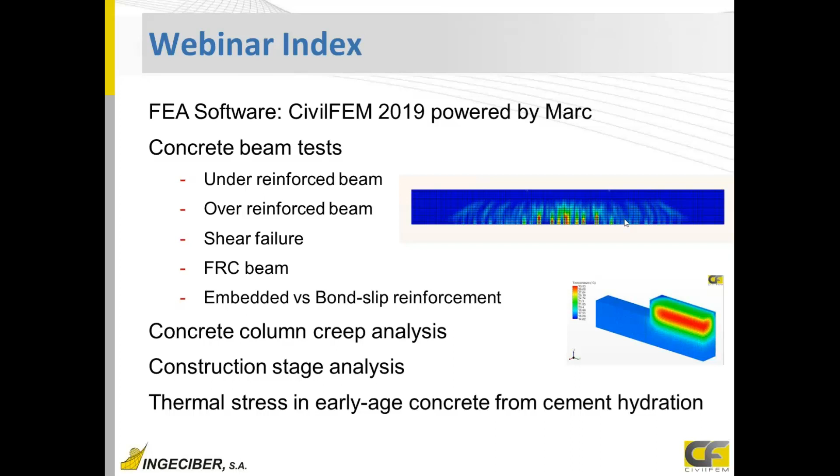So, first we'll have an overview of the software, that is CivilFEM 2019 Powered by Marc. Just to let you know, it is a multidisciplinary software which covers all the civil and structural engineering fields, geotechnical, construction, and as you can see, all these types of models for construction, seismic, foundations, power plants, all types of major infrastructure from the initial analysis to the end.

It's a general purpose civil, structural and geotechnical software that is focused on construction and civil engineering, and we are using a nonlinear solver, so it combines highly nonlinear models with code and standard verifications and some other tools. And the solver is Marc.

As you know, there's a big, reliable, trusted group behind this software, MSC Software, the developers and distributors of the famous Patran software, and because of an agreement between MSC Software and Ingeciber, we build and market CivilFEM Powered by Marc. So we are using the most advanced nonlinear solver from MSC Software. MSC Software is the company that develops Patran, Nastran, and so on.

So we are using a highly nonlinear solver, but combined with CivilFEM, focused on structural, civil, and geotechnical engineering. And let's go with the examples we are going to do with this software. It's very suitable for this type of nonlinear analysis focused on civil engineering.

First, for concrete modeling, there are different data that must be set. First, for the cracking and crushing behavior. For cracking, we have to input a cracking stress, and after that cracking stress, we can have a brittle behavior, that is a sudden loss of stiffness. We can add a softening modulus, and also we can add hardening and softening through a table for modeling fiber reinforced concrete.

Also for compression, we have this type of parabolic law that could follow nonlinear compression isotropic hardening with unloading and loading curves, or Buyukozturk plasticity. And also a Drucker-Prager series failure can be added to the model. Cracking and crushing are analyzed in principal stresses. The first example is an under-reinforced beam.

But before checking the first example, I'm going to have a small overview of the software. First, in the software CivilFEM, starting a new analysis, you have different options to generate the geometry, points, lines, volumes, Boolean operations as in any other CAD. So it's easy to use.

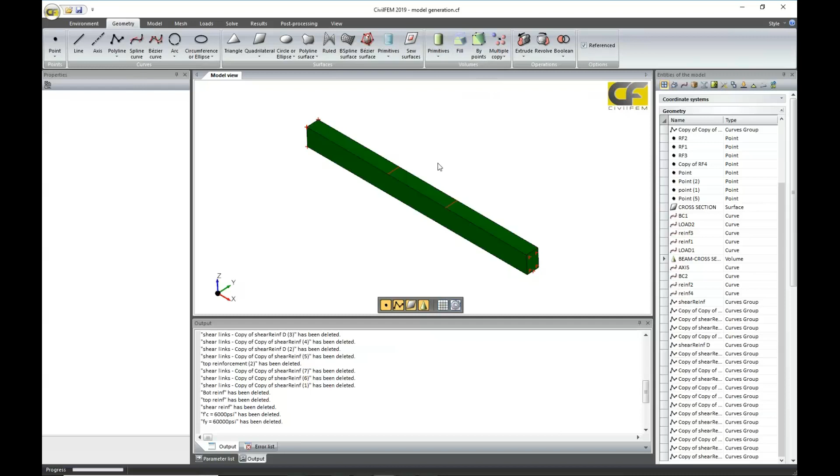Also, you can copy and paste the different copies. So it's very fast and easy. Also, you can import from any CAD. Just so as not to waste time, I've already generated the models, but this is a volume.

This volume will be meshed with solid elements for concrete. Also here there are some lines. We will use these lines for boundary conditions on bottom and to apply loads. So we will apply 2 vertical loads. It will be a simply supported beam.

Well, we will generate the model with solid elements for concrete, link of truss elements for reinforcement, and we will change different reinforcement configurations for analyzing different possible failures for compression, for cracking and tension of the reinforcement, shear, or different type of failures.

So well, once we have the geometry, then for the modeling, this is an office style software, so we have to go from left to right, following the different tabs. After generating the geometry or importing it, just model, first selecting elements. If we have beams or trusses, just the cross sections, concrete, steel, generic, and then we mesh.

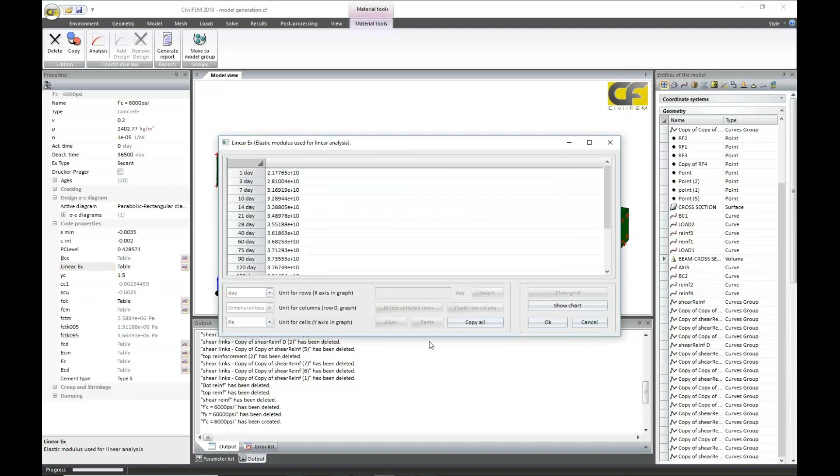For concrete, we select a concrete. In this case, it will be ACI code concrete, and we click here, this one. We will use it. Just clicking, we are selecting this material from the library. So all code properties are automatically defined here. For example, elasticity modulus, and all are time-dependent properties. So in the model, we can solve for different ages, and CivilFEM automatically updates all these properties.

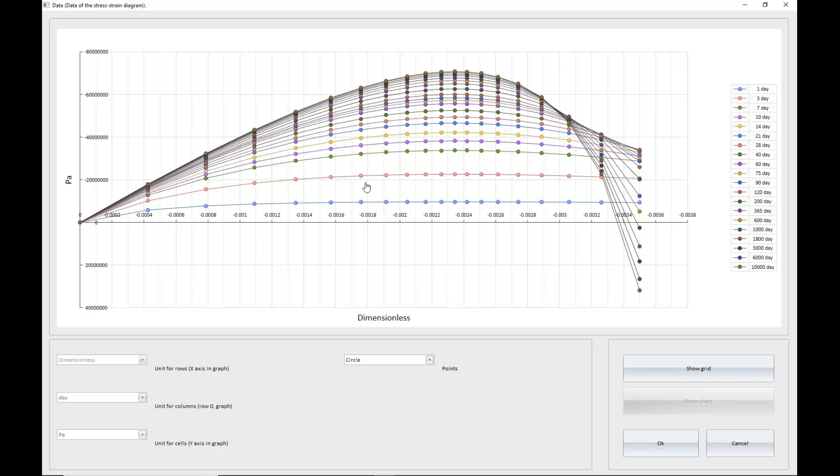Well, for this type of model, I would like to solve with a nonlinear behavior. So first, clicking here analysis, I will solve with short-term loads diagrams. This diagram is in the analysis diagram, short-term loads, this is the table that is going to be used. As I said, these are time-dependent properties, so I have several days with several stress-strain diagrams. When solving for different ages, CivilFEM will take one of these and change one for another if I'm solving the model for day 5, 10, 15 for evolutive stage analysis.

Also, it could be done with Buyukozturk plasticity model or isotropic plasticity model. I'm going to use isotropic plasticity models with loaded and unloaded curves, following the elasticity modulus and plastic deformation, which will make it easy to plot those plastic deformations. Well, that is for concrete nonlinear behavior in compression.

Let's see for tension. For tension, the first option is setting cracking. If I set cracking here, I will have crack stress. If I see the slides, this will be the crack stress I'm setting. I will have elastic behavior in tension, and when I get this crack stress, I could have a sudden failure of the element. I will have a vertical drop. Then I will have deformation without stresses.

Or I can have a softening or hardening and softening, depending on whether I'm modeling fiber reinforced concrete. The way to do that is here in the model: with softening modulus 0, it will be vertical. I can add a value here. In this case, it's a softening value that depends also on the properties of concrete, or it could be variable. It's variable with this table, an example.

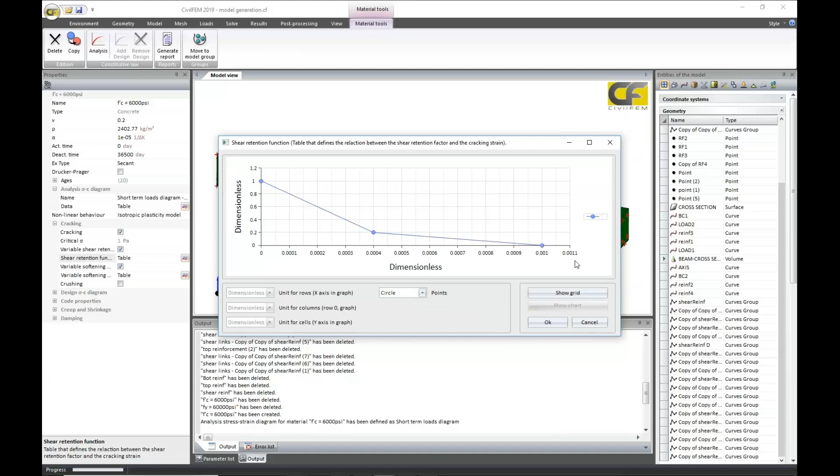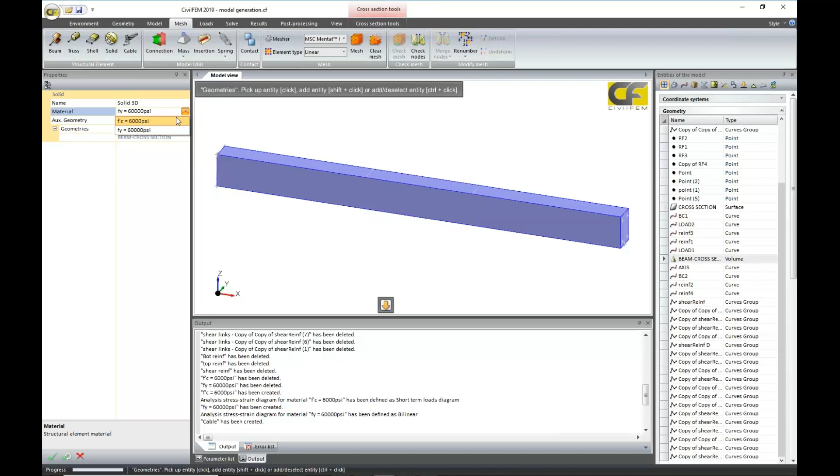So for the mesh, first for the solid elements, I'm going to create just for the beam the concrete material. Click here, and then I create mesh controls. I'm going to extrude the surface to have control in the section and in the extruding direction. As I need a very accurate model for crack developments and so on, I'm going to create a mesh, just as an example, with 2 centimeters element size in the section, and 1 or 2 centimeters in the length.

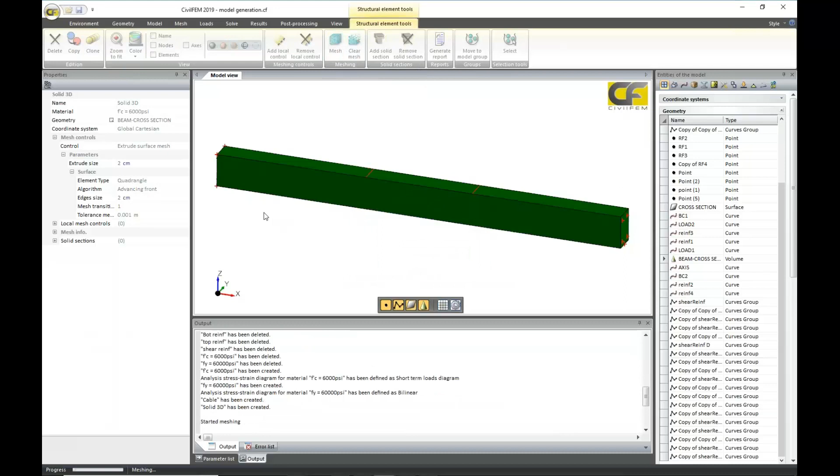So just click in mesh. I generate the mesh of this. Here you can see the meshing progress. Yeah, the finer the mesh, the more accurate it is, but you can always perform an estimation.

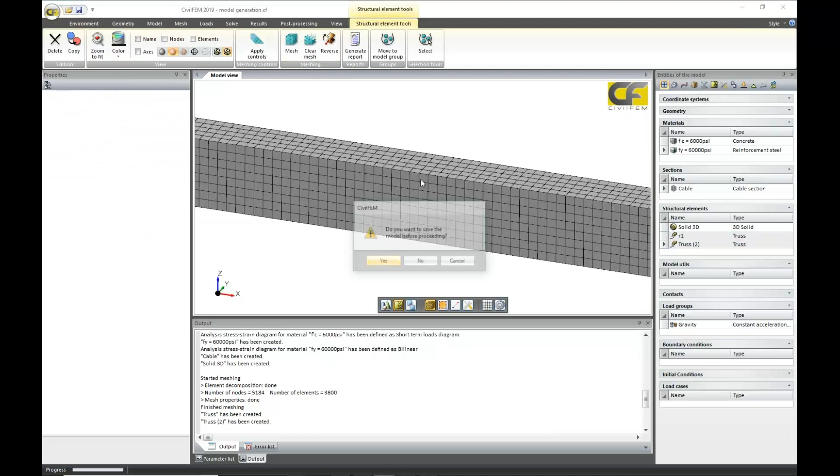In the same way, I can generate the reinforcement. So I'm going to add this bottom reinforcement, for example this one and this one, and just clicking here, I generate. Here you can see I've generated 2 trusses, reinforcement 1 and reinforcement 2, and I mesh both. Once I have meshed both, I just have to insert one into the other.

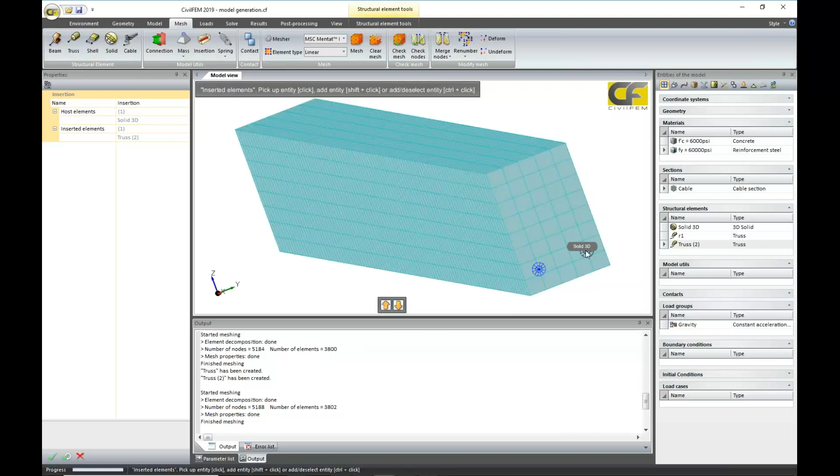You can see I don't have a congruent mesh, so I cannot merge the elements or the nodes, but I don't need to. A very important tool in CivilFEM is the insertion. If I click here on insertion, I'm going to insert into this model the 2 rebars, this one and the other one. So with this tool I insert reinforcement into concrete, and they will all work together. You couple the degrees of freedom of each entity.

So I did all the examples following these options, but I modified the bending reinforcement diameter and the reinforcement configuration, and applied 2 loads on top at a distance of half a meter from the support. It has a 1.5 meter span length, and I apply loads with different reinforcement configurations to analyze the possible failure. You will see them in the slides now.

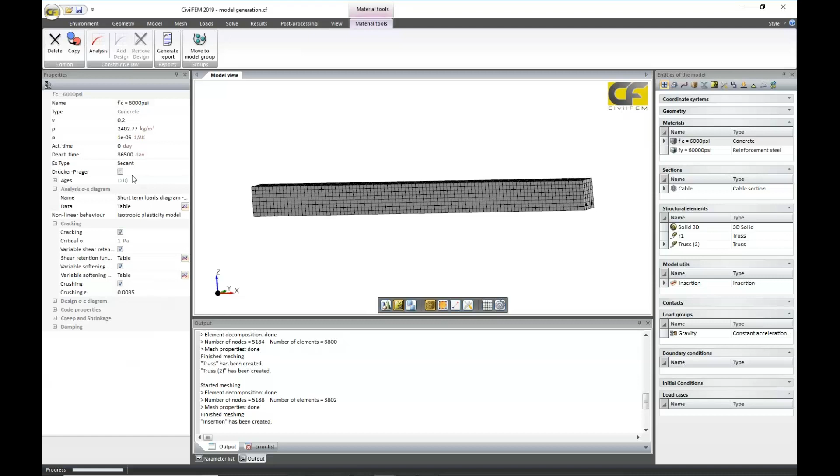Also very important, for compression I set a parabolic law, it will load and unload. But if I would like a brittle compression behavior, that is crushing, I have to set crushing here and define the strain for crushing. Codes limit the compressive strain of concrete to 0.35% or 0.3%. In this way, I will also have crushing failure. So we have completely defined all non-linearities. Now going to the models.

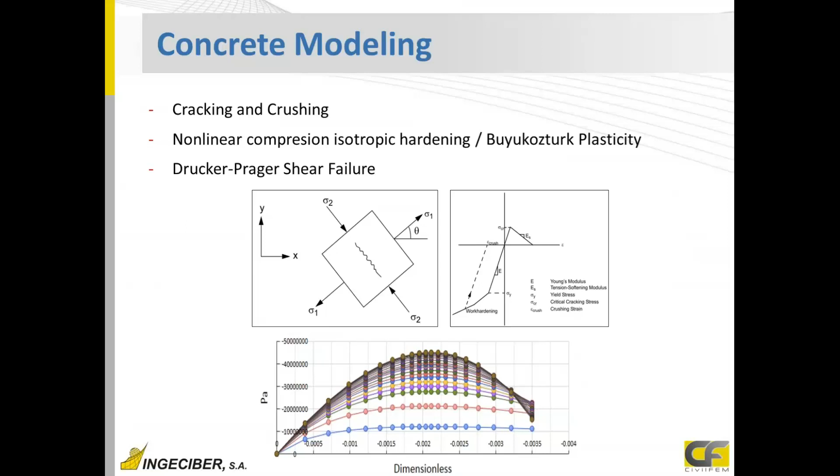Let's see different reinforcement configurations, and the next step is applying a load and solving it. So the first model, an under-reinforced beam. What I have here on the bottom is 2 bars of 16 millimeters, that is 400 square millimeters, and shear reinforcement, just enough to avoid shear failure, and I apply 2 loads.

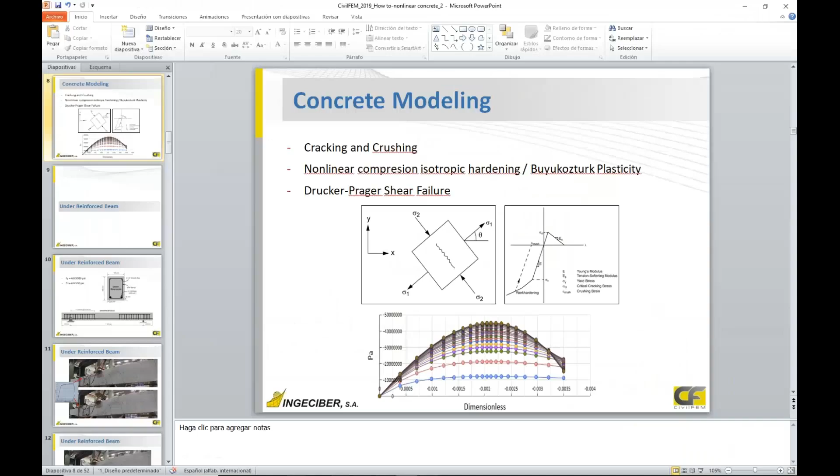Once I apply loads, I increase those loads till failure and analyze the different failures that happen. Also, these examples are compared with real tests. You can find these real tests in Structure Pro, and they have them in videos. They have analyzed them here in these videos.

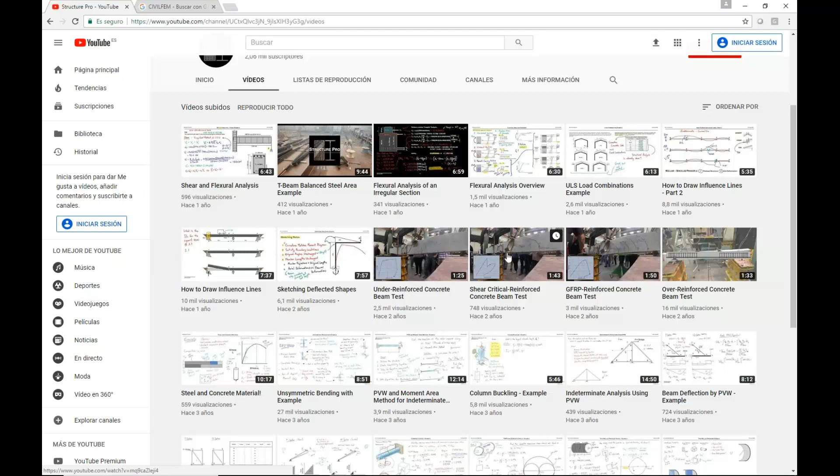They have different tests where they apply loads till they break those beams and get the relationship between loads and vertical deflection. So we follow the same examples and compare real test results with CivilFEM results. You can find these videos in Structure Pro at YouTube. So just analyzing the first example.

If we go to the software, just under reinforcement, this is the model we had. Here, this is the load we added. So here you can see simply supported, 1.5 meters span, 20 centimeters at both sides. Loads on 2 points at half meter from every support. So half meter to first load, half meter to the other, and half meter.

And we apply load till collapse. Till the model collapses means not converging, because the model breaks and doesn't converge. So it has been solved in 25 steps. And if we plot in one of these points the vertical displacement versus the load, we get this type of curve. We can see in this case we have a ductile behavior.

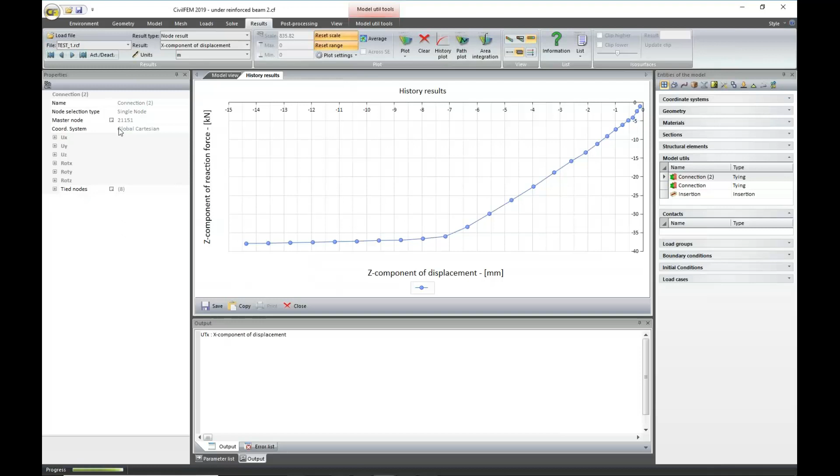First step here we have a modification, so it could mean cracking starts, but mainly elastic behavior. And then we have here a horizontal branch; the maximum load that we can apply is between 35 and 40 kilonewtons. So let's see what's happening in the model for these points, for the last one. So just going to the last load step that was solved.

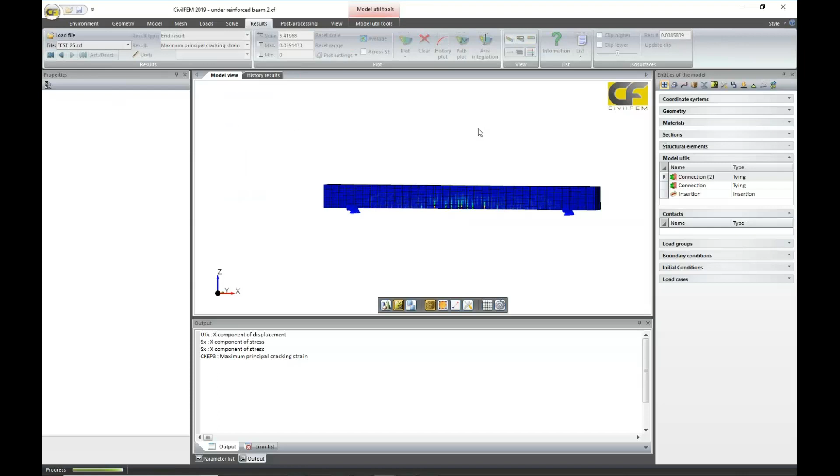Here in the model, I'm going to plot first cracking. So I'm going to plot here maximum principal cracking. Okay, I can see I have mainly bending cracks in the center. As I have here high crack widths, just to be able to see the rest, I'm going to reduce the range a little bit. So just one and plot here.

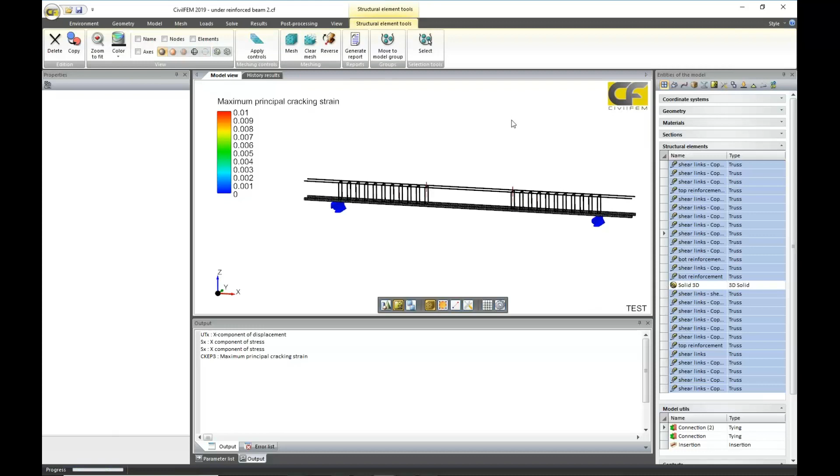I can see I have mainly bending cracks and no high shear cracks. So I can imagine this is mainly a bending failure. So if I hide the concrete part and plot the reinforcement bars, let's see if yielding is happening. As I saw here, I have 2 bars of 10 millimeters. So I'm going to plot the equivalent plastic strain.

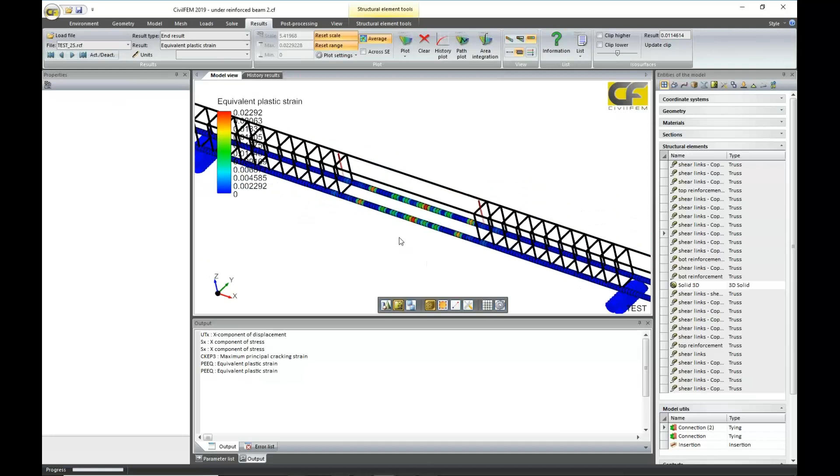I can see I have high yielding values where the cracks were generated, and only for bending, but no yielding for compression reinforcement and for these parts. Okay, so results quite good and just what was expected.

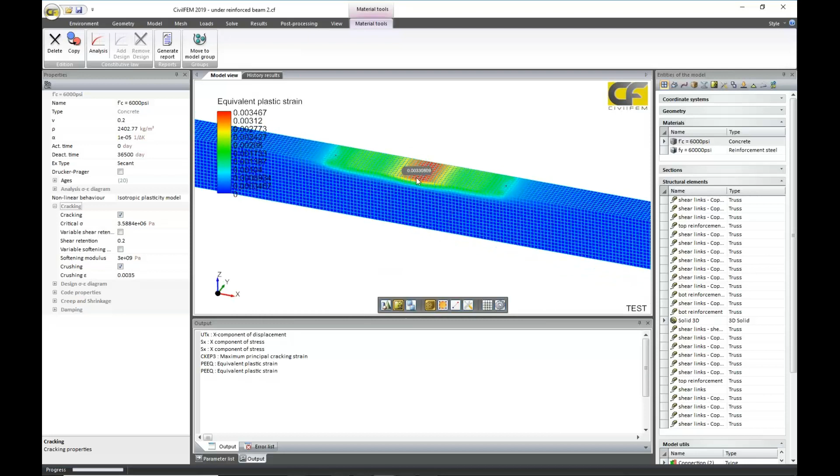I'm going to plot the crushing zone. As I said, I'm using isotropic plastic modeling, so compression deformation is analyzed by equivalent plastic strain. Here in my material, you saw that I have limit crushing to 0.0035. So it means when it reaches 0.0035, there's a failure. So I can see in this model I have at the end a compression failure, crushing in this zone. But I also have yielding and high cracks here.

So I can see I start having cracking. Let's plot this point. I can see I have first cracks, very low compression strain, but cracks, and still yielding. And then the final step is high cracks, still yielding, and finally we have compression failure at the end as well. So let's see the slides.

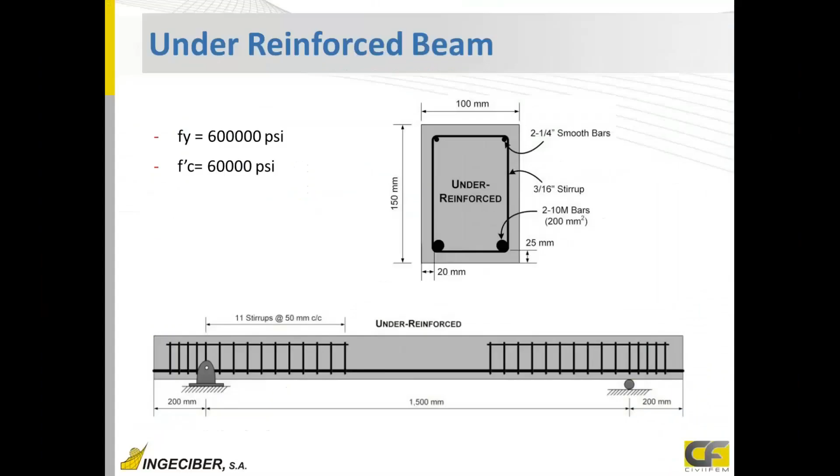You can see we can monitor each step of the analysis. Here, these are the tests that were done, and you can see this horizontal branch, which is between 35 and 40, close to CivilFEM results. Cracks start mainly in the center and vertical, so they are not shear cracks; it's mainly bending. And then when we have this sudden collapse, you can see a piece of concrete is broken due to compression.

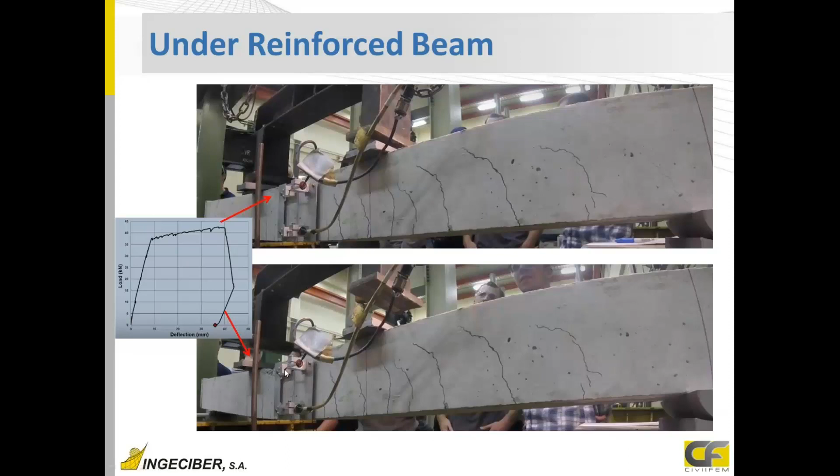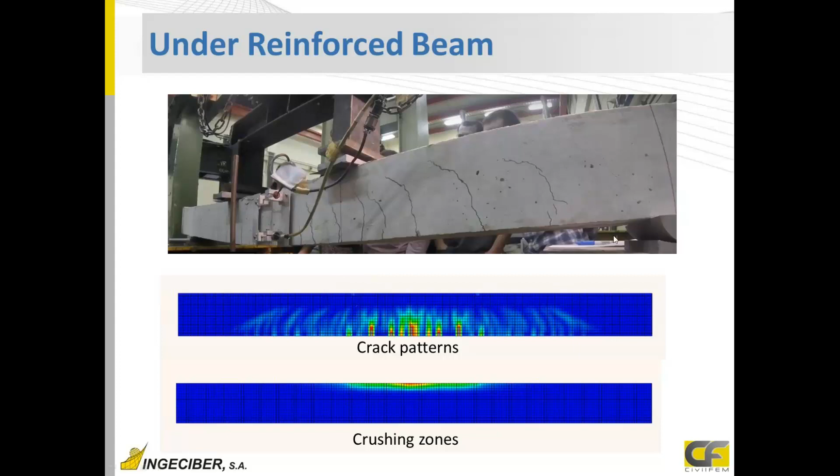So we have first cracks, yielding in reinforcement, and this is under-reinforced. It means it is yielding and getting high values. So if we compare values, we have crack patterns that are very similar, vertical, mainly in the center, and not much shear, and also crushing zones in the center, similar to the ones we get. Here we have a video.

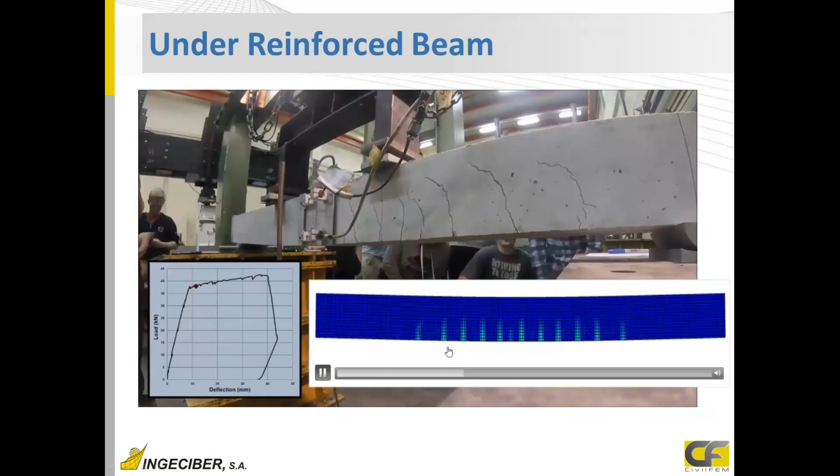In this video, you will see a point moving here, which is the real test, load versus deflection. And here we have the same model, but in CivilFEM. So here you can see that cracks start, vertical cracks as here, then they increase a lot, the horizontal branch, and then sudden collapse due to compression, more or less at the same time.

If we compare both curves, they start at similar points around 36-37, similar to CivilFEM. The CivilFEM curve is more horizontal because yielding in steel has a horizontal branch, with no hardening added for steel. The real behavior of steel has hardening, which this curve lacks, so we get a more sudden behavior earlier due to compression in concrete. The accuracy of CivilFEM is very, very high.

Next model, very similar, but in this case we increased the bending reinforcement a lot, from 16 to 20 millimeters diameter, increasing the area from 200 square millimeters to 600. Now we also don't have compression reinforcement, so we expect failure due to compression and not much yielding in the reinforcement.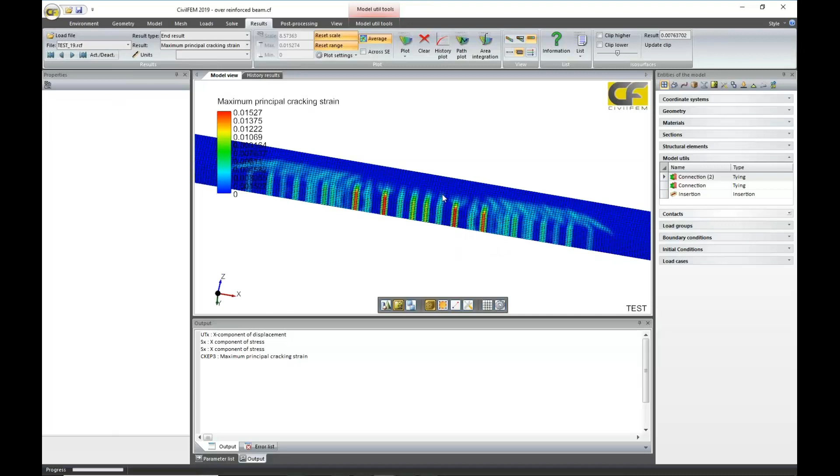I'm going to plot average values, but they are not as much as before. Bending cracking, but they are just small - they don't cross the whole section like they were doing before. Some cracks. Let's see what happens with reinforcement.

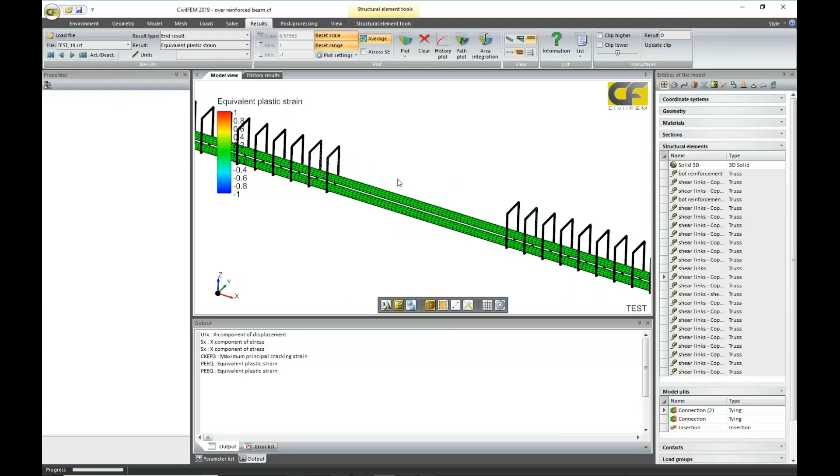In this case, let's plot equivalent plastic strain. We can see there's no yielding, so we're not having problems about tension in this model - no yielding in steel. You can see between 1 and -1, green is no yielding.

Now let's plot what's happening in concrete - concrete equivalent plastic strain, which means compression failure. We can see just at the points where we're applying loads we have higher compression, and in this load step it's around 0.25%. As we increase the load, just in this step it's 0.29.

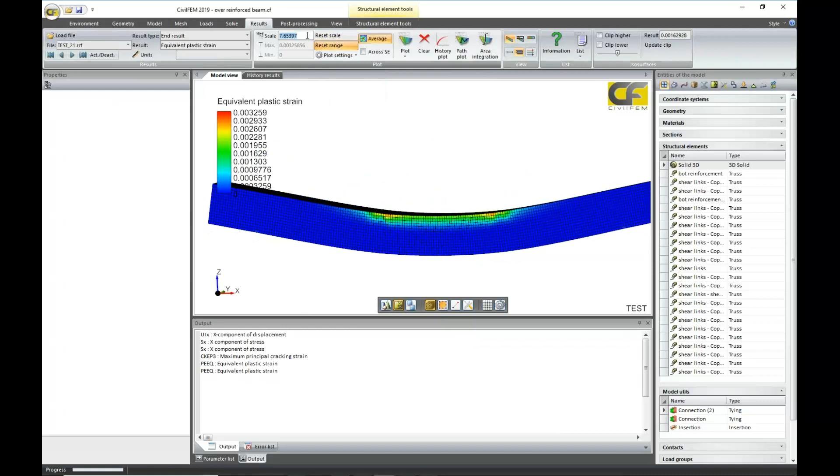This is the undeformed shape, but we can also plot the deformed shape, scaled as an example. At step 21, this is the deformed shape scaled. We can see at this point we're almost at the limit - 0.0032, and the limit is 35.

So next step it collapses and doesn't converge - that's what happened, the model breaks down. Those are the results: compression of concrete, then sudden collapse. So it's a brittle behavior of concrete due to compression over reinforced sections.

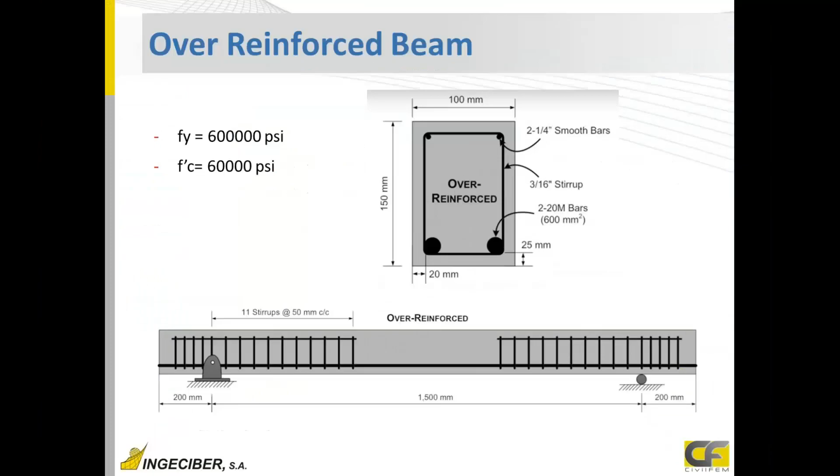If I look at these results, the test shows compression broken from the supports, from the loads I'm applying - 2 different loads at half a meter. Here we're applying a load here and another load here. So failure happens instead of in the center, as we saw before. It starts where we're applying the loads, and in the test there's a sudden collapse at 90 kilonewtons.

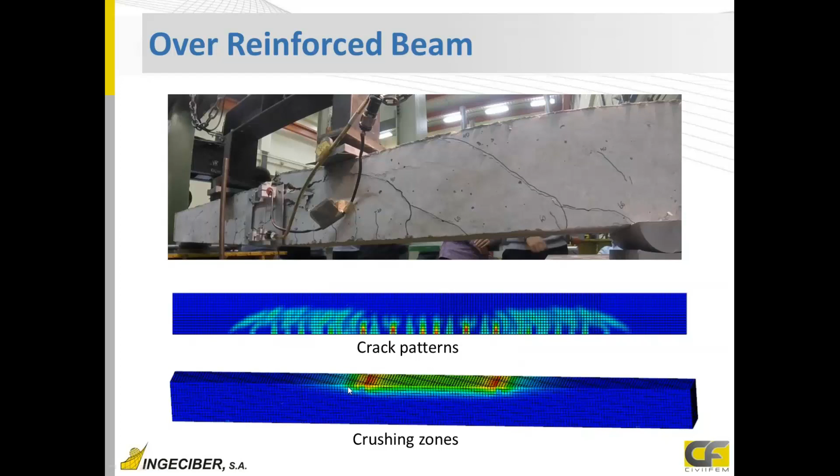Comparing the crack patterns: not high cracks for bending, not penetrating much, short and similar. Shear cracks are longer but not very wide, and crushing zones, which is the most important and represents the failure of this model.

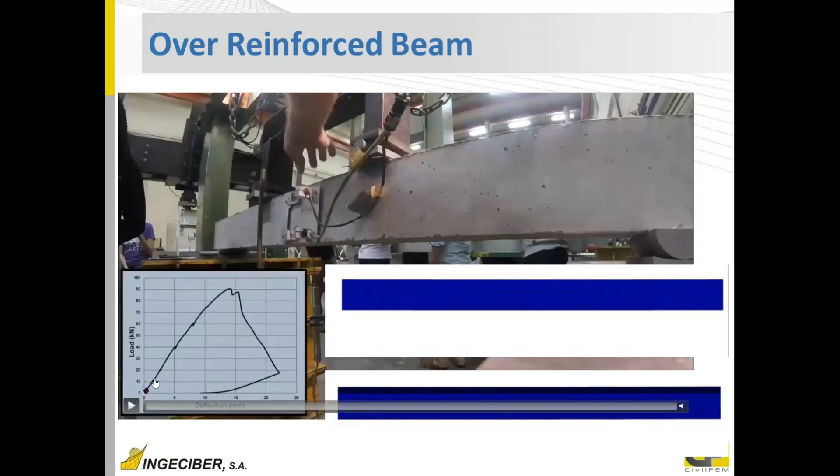In this video we compare the real test. Here we'll plot cracking, and here compression, deformation, and crushing. And here we'll see the relationship between load and vertical displacement. We can see first cracking started appearing here and here, similar. Shear cracking started appearing, and then just crushing happens. Let's see the video.

First, again, cracking at the bottom of the test and also in the CivilFEM model. Sorry, I didn't play both.

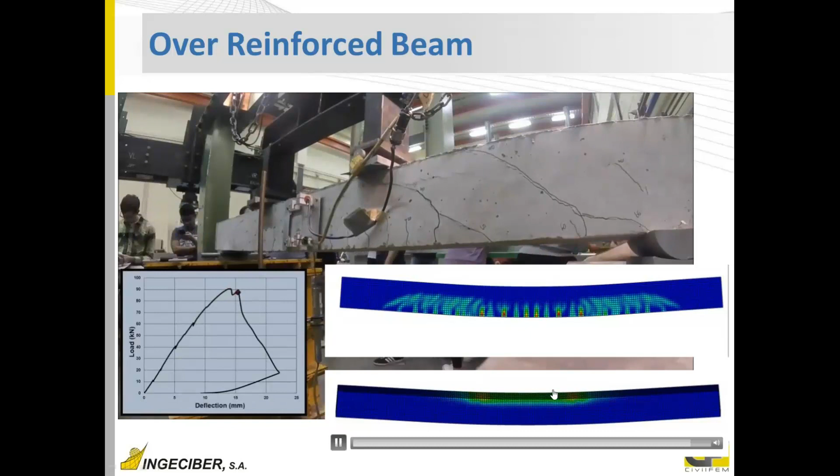So now we are playing both cracking in the CivilFEM model and in the test at the same time. Just when we are reaching the maximum load, here we can see cracking at the same time that it happens in the real test. Yeah, the accuracy is very high.

We can see the deflection versus load. It happens at about, in the real test, about 14 millimeters and 90 kilonewtons. With CivilFEM, it happens with a lower deflection, so we are having just like 90 kilonewtons and 11 deflection. So the accuracy is very close.

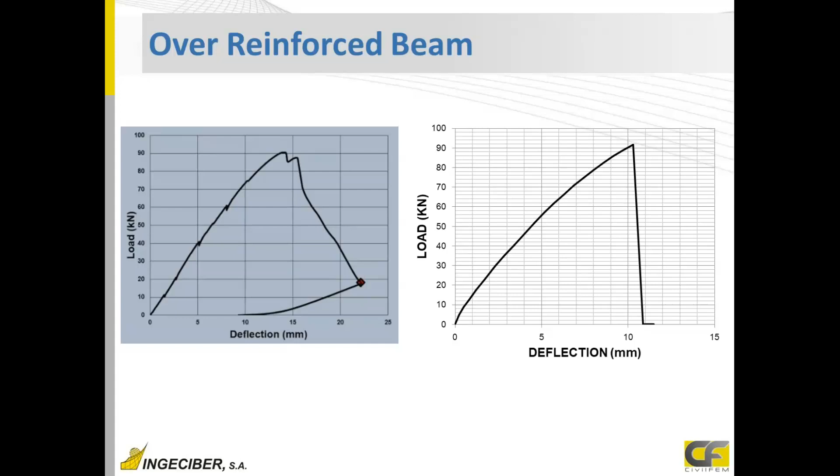I have to say we are using code and standard values for this, just concrete as a small variation. So maybe testing the real compression behavior, the real stress-strain relationship, we could have much more accurate results.

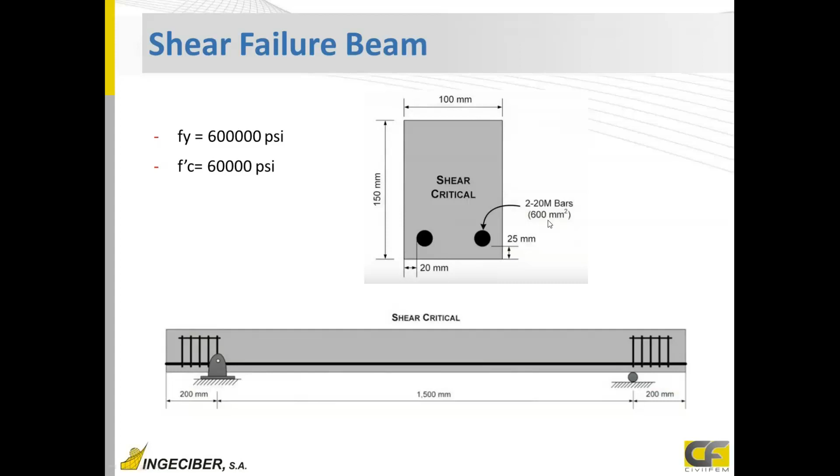Next model is shear failure. In this case, we are not adding shear reinforcement, we are not adding stirrups here. So only bottom reinforcement, the same that we had in the last over-reinforced bending model, but just removing that. So just checking the model as we did before.

The shear critical model, here it is. I'm going to plot vertical displacements versus load. Here we can see we have more or less a linear elastic behavior, and then suddenly failure.

Due to these cracks, I'm going to plot the last point to see the crackings, and what happens between this and the other. I'm going to start plotting this one, and let's advance to see how cracks are developed.

I can go to the last one. This one, for example, is still in this linear behavior, more or less linear, and I'm going to plot crackings.

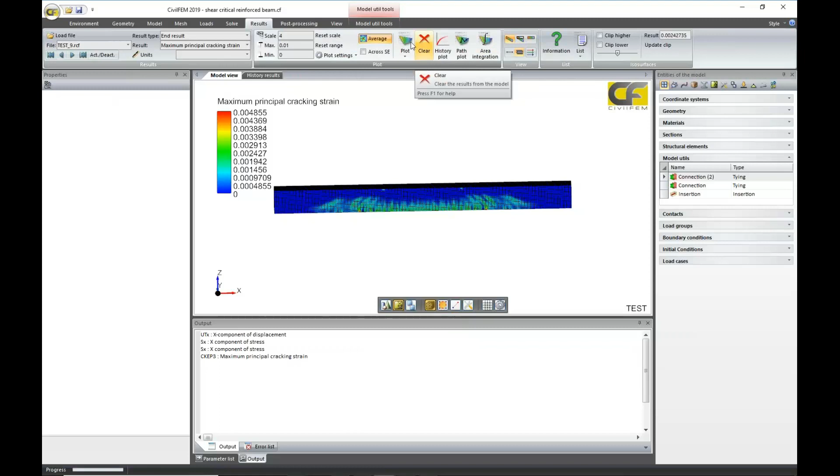I can plot cracks in X direction, Y direction, or maximum and minimum. Well, I can see here, these are my cracks. I'm going to fix the range so we can appreciate all the cracks.

So at this point I have some cracks, but not very wide. Mainly here I can see some shear cracks are higher than the bending ones, on both sides, but still not too high. So I increase the load, advance to next step.

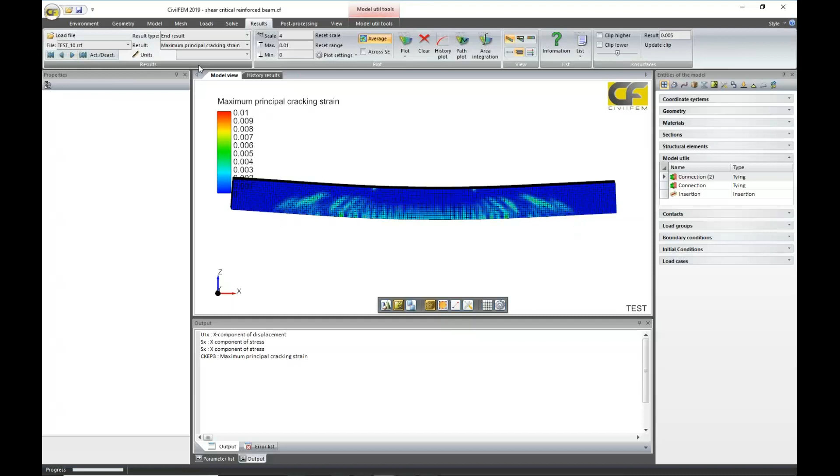Next step, you can see shear cracks are developed following 45 degrees from the supports. Suddenly a huge crack is developed, which means collapse at this point.

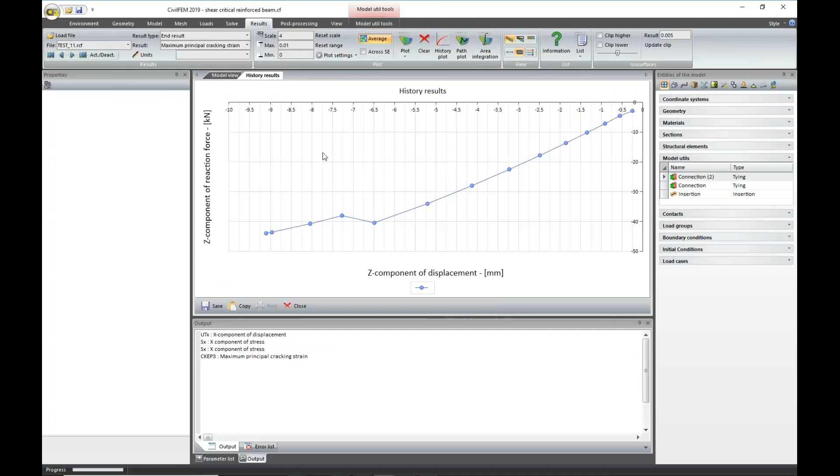And then we have some other steps that were solved, but you can see this is just complete collapse. So we could suppose this is the ultimate load for this model.

I increase it, and you can see the crack is almost crossing all of the model, and this is just converging because we still have some steel joining both parts, crossing from one point to the other. Then finally it doesn't converge.

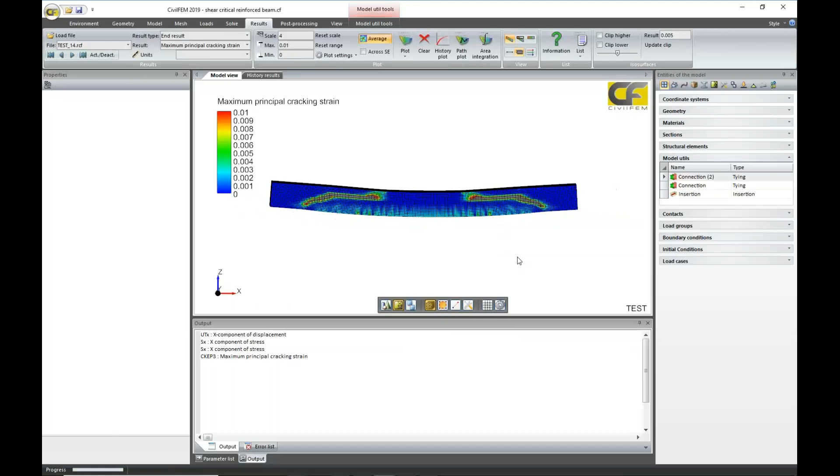We could also see yielding at the bottom, but it's very clear that it's shear failure.

If we compare with the real test we had, here you can see the model is the same, and here you can see that shear cracks are developed, high shear cracks, and we have the same type of behavior, vertical and sudden collapse.

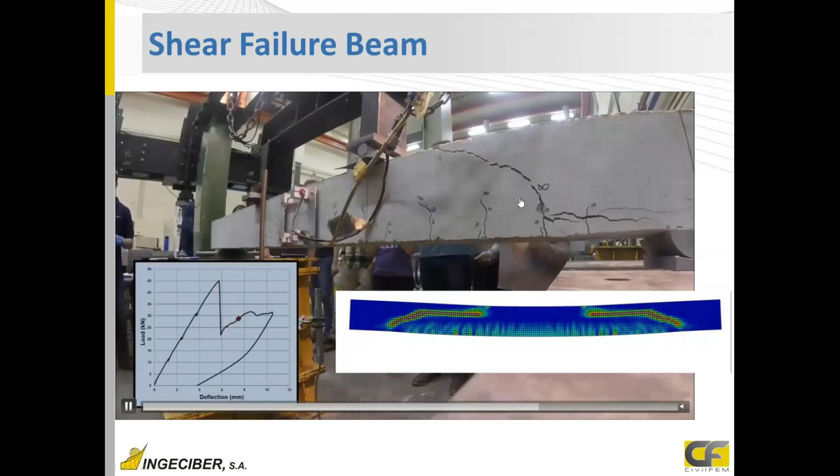Crack patterns are very similar between the real test and CivilFEM. Here we can see the real test with load versus deflection, and pay attention to the shear cracks being developed. In the videos, we start with some bending cracks at the same time, then shear cracks are developed, and collapse happens in both videos.

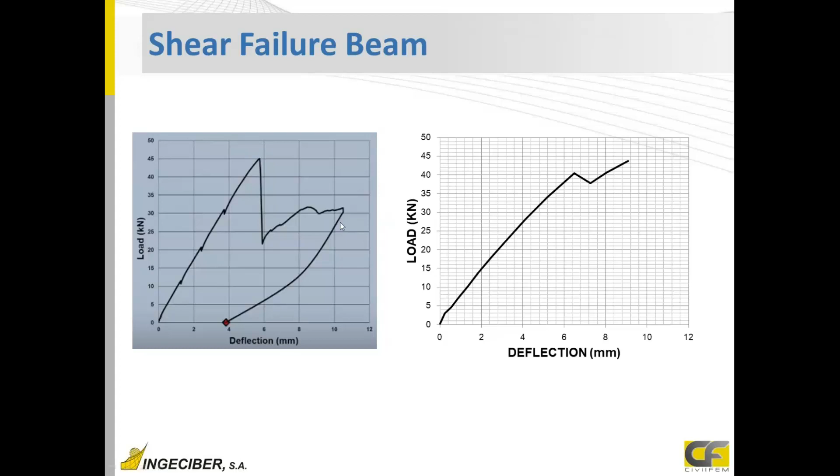If we analyze the curve obtained with CivilFEM, we can see that at a deflection between 6 and 8, around 7, at 40 kilonewtons, collapse is happening, just as in the real test. It happens for a similar load, a little higher, about 45. Ours is a little bit under 45, and also more or less the same behavior, but just brittle behavior, no ductility.

So for increasing ductility in this model, we are going to solve the same model, but adding fiber reinforced concrete. The way to add fiber reinforced concrete is just by modifying the post-cracking behavior. So here, concrete cracking, and I can see this here, shear variable softening. What I'm doing is adding this load.

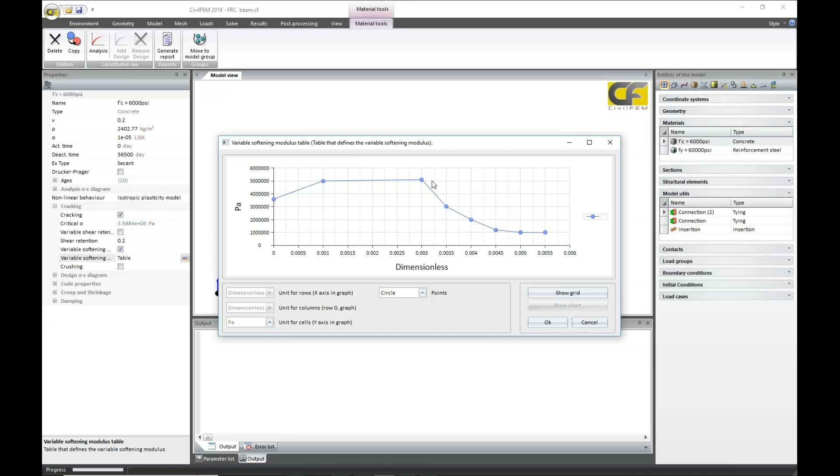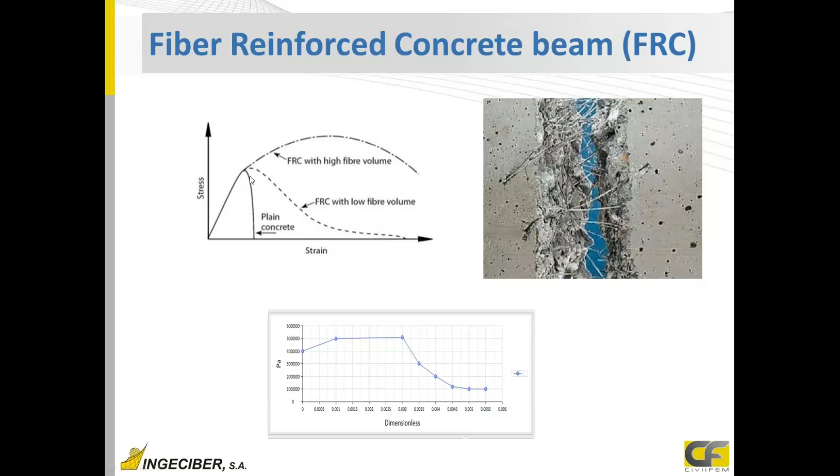After crack, this is post-cracking behavior. So after crack, I add a hardening, and then softening with high deformations and a remaining strength. This is similar to the typical behavior we find with fiber reinforced concrete. After crack, we can have hardening and softening if we have a high fiber reinforced concrete, or if we have low fiber content, it will be a softening but with smaller behavior. So I add high content.

Just checking the model, we can see it is exactly the same model that had the shear failure. I'm going to load all of this, and also in one of the bottom nodes.

I'm going to plot here again the reaction versus the deflection. We can set any kind of units. We will set displacement in millimeters and reaction force in kilonewtons, for example.

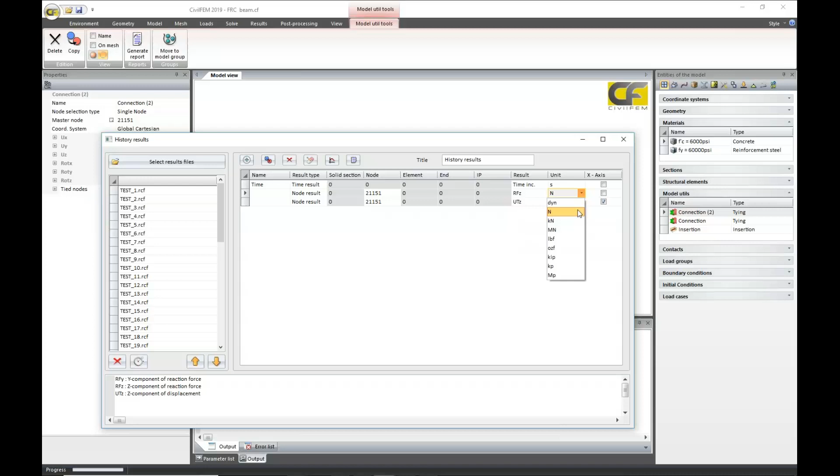If we plot this, we can see the previous model just collapsed between 40 and 45 kilonewtons, with 6 millimeters. Now we increase the behavior, and we have a ductile response of the structure. I applied and stopped the calculation when it reached 1.2 centimeters, but it was converging. It means I didn't have collapse here.

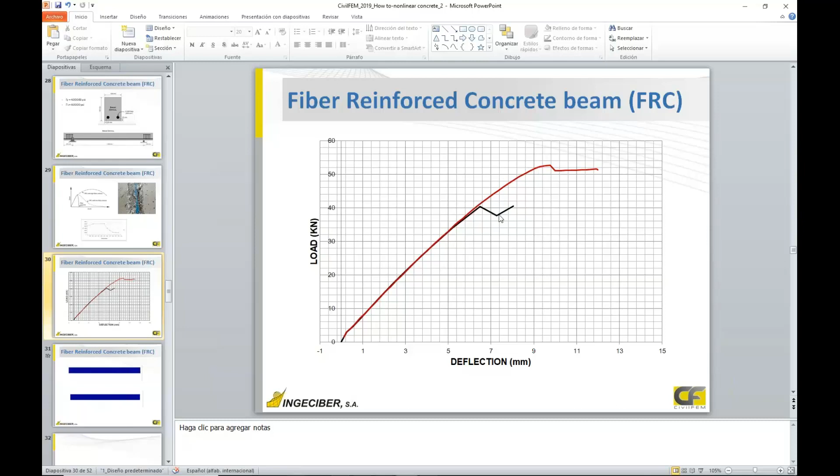I just had a horizontal branch, a very ductile behavior. This is not the last point, I solved just till here, you can see in boundary conditions. I just solved till reaching 1.2, but it kept converging, so the ductility is much higher. So comparing both results with and without fibers, the behavior is much better.

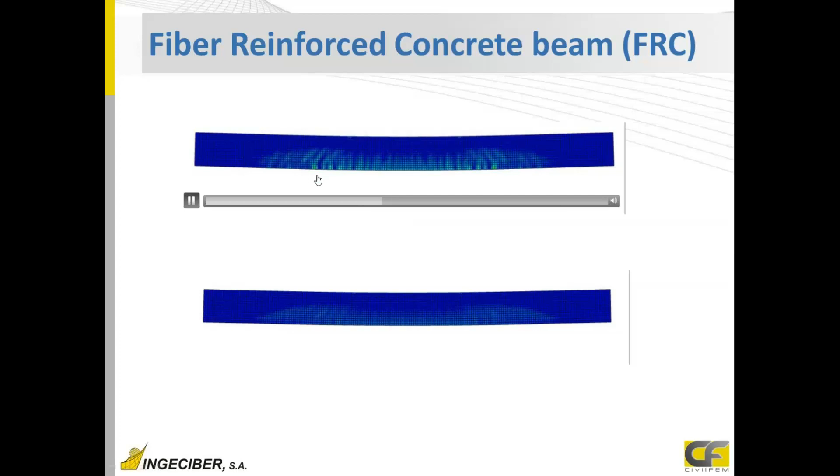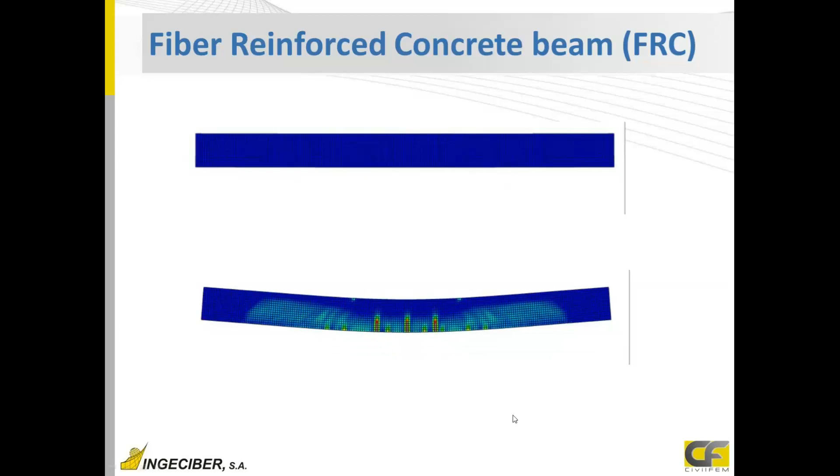Here you can see the two videos. Here is without fiber, and here is with. You can see cracks are much higher here, and we develop shear cracks. Here are much more split cracks, and mainly we are having these bending cracks, but not collapsing, and you can see it lasts much longer. It can support much longer loads.

So now the last example. We have consumed most of the time for this webinar. The last behavior we would like to see is bond and slip behavior. At the moment, you saw we have inserted reinforcement into concrete, so it works like completely embedded reinforcement, completely bound.

But for this type of behavior, you can see that in corrugated reinforcement, we have first an adhesion, so they work completely together. Then some cracks start and some crushing zones start, so we have this behavior like cracking and failure of the concrete keys between corrugations. Then once they fail, the only thing between reinforcement and concrete is friction.

So the way to add this into CivilFEM is adding cohesive contact between the rebars and the concrete. I added this behavior with this table. So here you can see the bond slip.

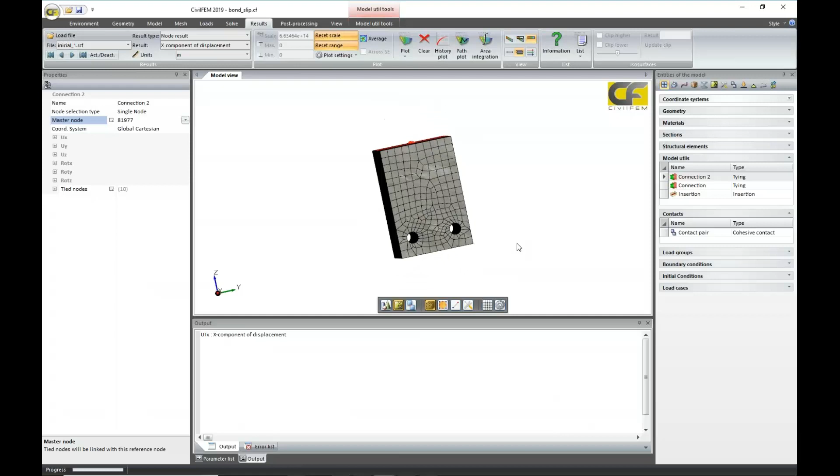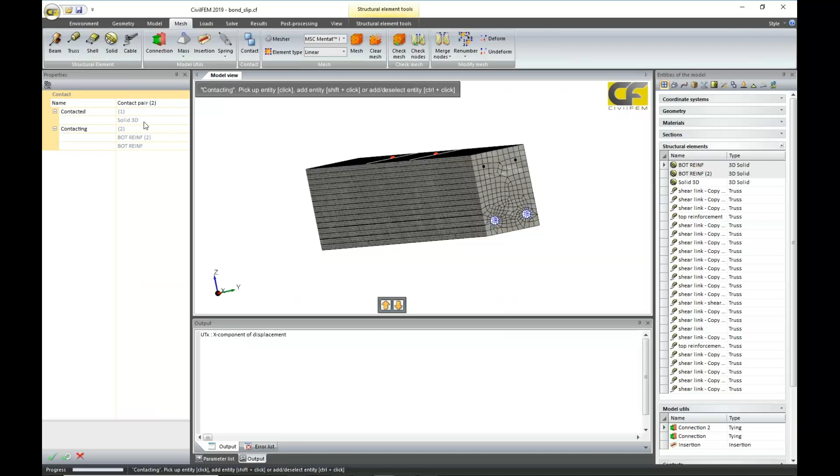Now this model is similar to the previous one, but what I did is model the reinforcement also with solid elements, and added contact behavior between them. The way to add this contact behavior is very easy. Just select contact, the contacted part is the concrete, click here, contacting part is one reinforcement and the other, so I have contacting solid reinforcement. Click OK, and then I define this behavior.

It can be glue reinforcement, which will be completely embedded, or cohesive contact. For this cohesive I define the normal direction, which will be completely contacted, automatic, and just shear, tangential direction. So if I click here, I will have bond slip behavior.

And I define that bond slip behavior through a table inserted with stress versus displacement. As I had previously done this model, this is my contact behavior, and this is the stress displacement curve that I have added.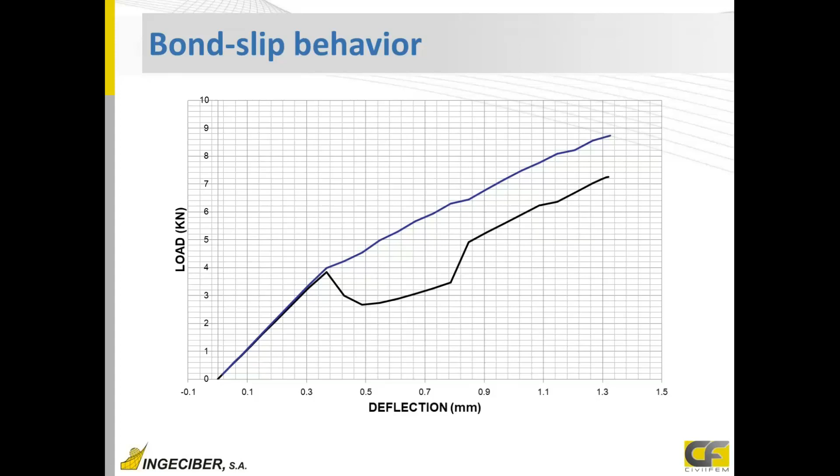Yeah, you can simulate the pull-out very accurately. Yes, you can simulate pull-out of anchors, just any type of anchors, reinforcement inside concrete, so this type of tool is very useful.

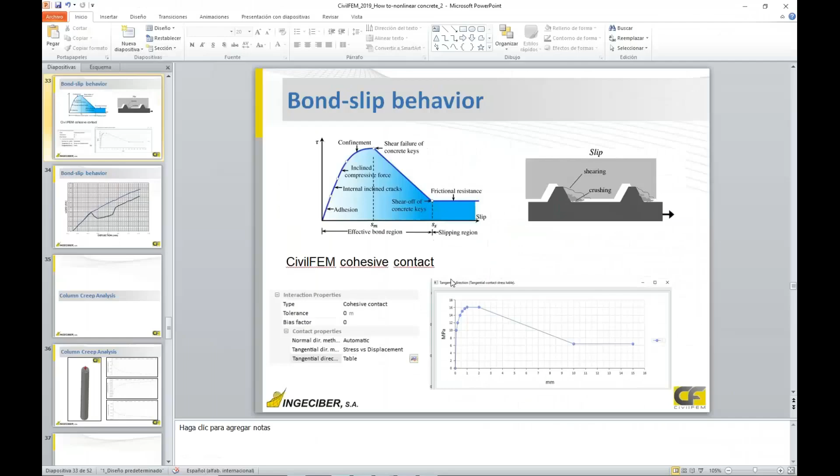And well, just the last example we are going to see is creep. We don't have much time to see this example in detail, but just for you to know where to set these values: creep for the creep model in concrete material, very easy as well. Concrete, we saw cracking, crushing, and then for creep we have to update here creep. Instead of no creep, solve step by step, and select the code.

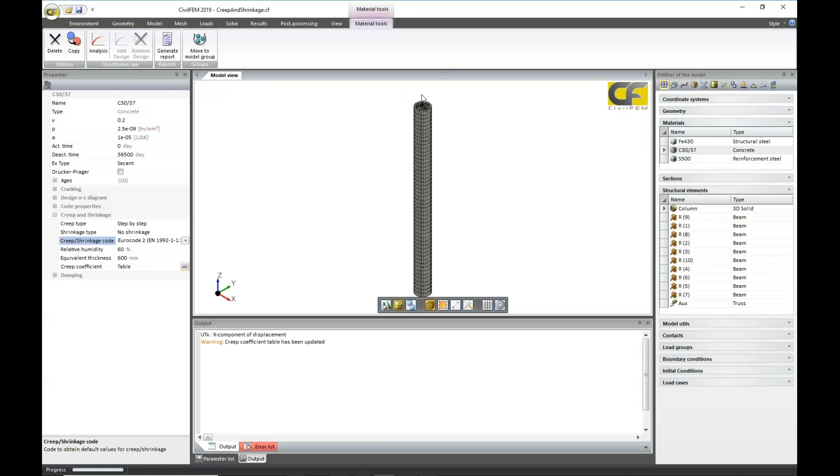Also, we have to set relative humidity, equivalent thickness, and well, creep coefficient depends on the updated table. Just setting these values, also we could add shrinkage. We apply a load and solve following a calendar time. The calendar time is very important here: in materials, you have the activation time. It means this is the day when you place concrete. If I set it to 0, my concrete of this column is placed on day 0.

Then for the load cases, when I'm solving the different load cases, for example, the first load case, I will solve it for the calendar time 10 days. CivilFEM will update material properties to 10 days and also will apply this load during 10 days to calculate creep. So we solve different load steps for different ages from 10, 25, 90, 365, and so on. And so we solve considering creep.

So we will have different results, strain, stresses in concrete, and also in steel, because this is a reinforced concrete column with inserted reinforcement, so we can consider creep. And very important, this calendar time is very useful also for construction process. For example, if we have different concretes, different activation times, if I concrete first on day 5, I should set here day 5, then if I add a slab over that 10 days after, I will set the activation time to the days after.

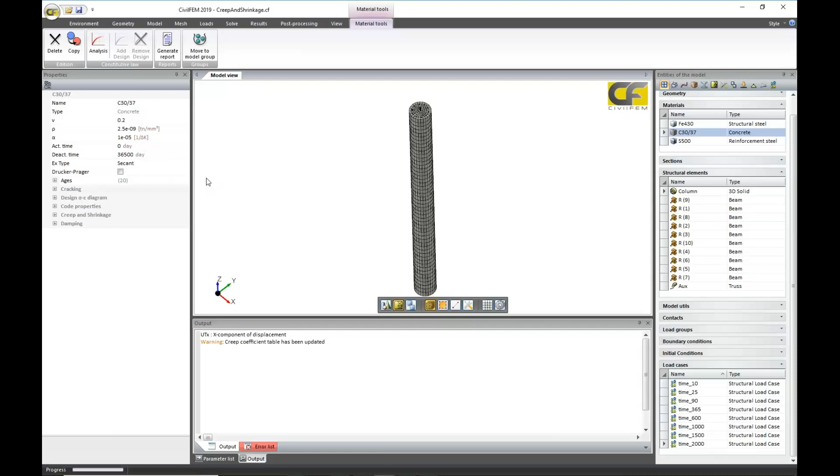So using this calendar time, I can perform really accurate construction stage analysis, considering time, and CivilFEM will activate material properties, stiffness, and any material properties will be updated during the stage process. So this stage process can be used for calculating creep.

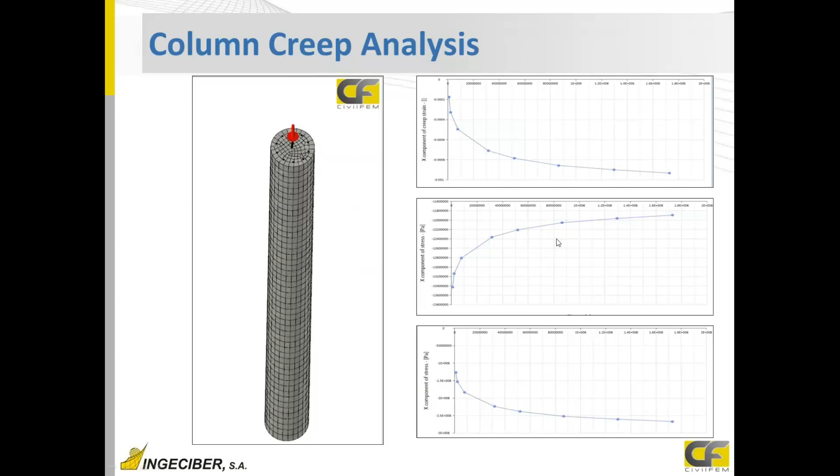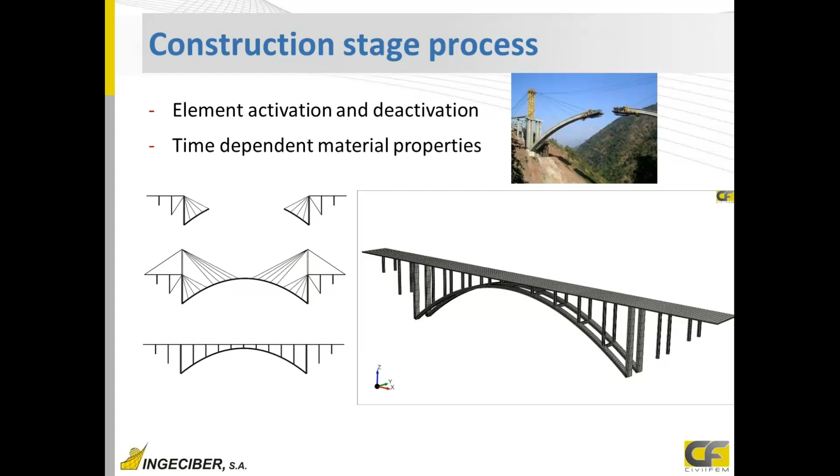And also this calendar time can be used for any type of construction stage. For example, this bridge: every part of it has a different concrete material, and the activation time is different. So we solve different load steps with a calendar time. So what you can see, the CivilFEM concrete nonlinear material model can consider cracking, crushing, also evolutive stage analysis, and the last point is coupled thermal structural analysis.

In this example, we applied the effect of heat generation from cement hydration. So we set the law for this volume that generates heat. This heat is reduced over the days. And also we added ambient temperatures on top, and we consider the insulation due to the casing around it. So this is good to calculate, for example, the height of the new concrete blocks over the old one to avoid cracks due to thermal stress.

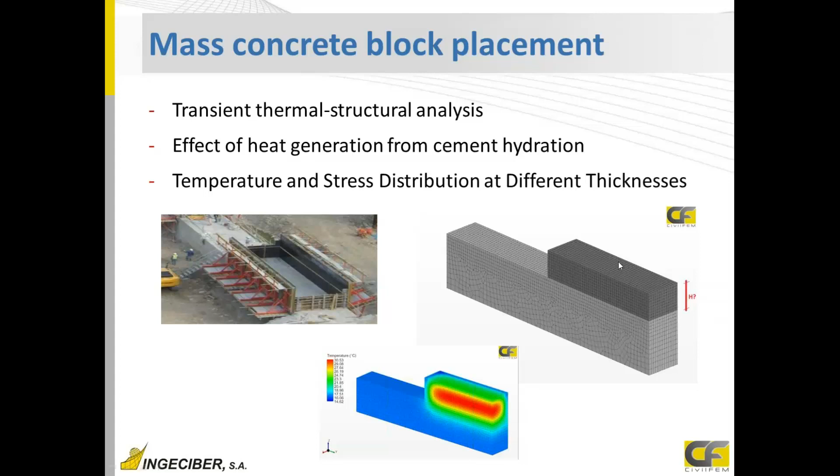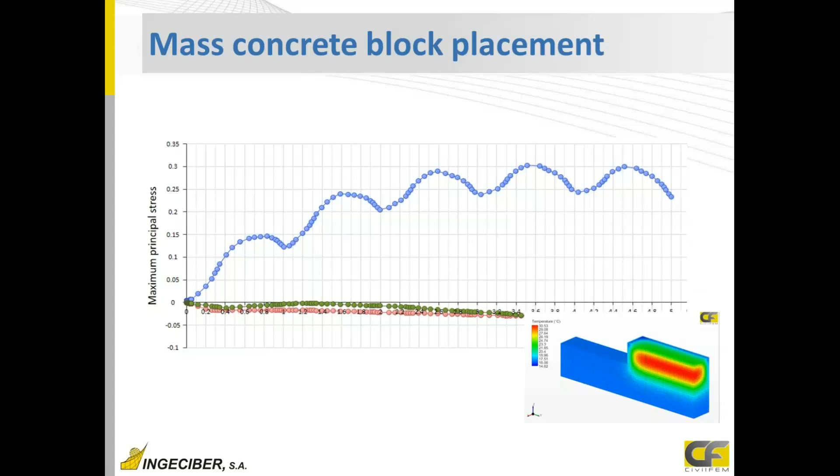And also, in the middle and bottom, it is under compression, so we don't have tension, we have compression, so we'll have no problem of cracking. This is another example that we can solve. So we can mix thermal-structural coupled analysis with evolutive stage analysis and cracking, crushing, and all types of failures.

So, as a summary, you can see the concrete material model is very powerful and accurate, and also the most important thing is that it converges very fast and easily. We can model cracking and post-cracking behavior, tension stiffening and softening. Very important is the shear retention factor, which is the factor that multiplies the shear stiffness. For collapse, we have to set the table so that this shear retention factor depends on the crack. So that's set to 0.

Crushing with a strain for crushing; codes set it to about 0.3, 0.35%. Also creep and shrinkage strains, long-term strains. For reinforcement, not only passive reinforcement, also active reinforcement. I mean, we can model tendons, post-tensioned concrete. We can have yielding reinforcement, and also embedded or bond slippage behavior, and construction process activation, deactivation, and time-dependent material properties, mixed with thermal-structural analysis, so very detailed analysis of concrete.

And applications are many. It can be applied to any concrete model. CivilFEM also can design these structures under codes and standards. That is good for slabs, beams, and so on. But in disturbed regions, such as this beam-column joint, this type of nonlinear analysis with cyclic loads or any other transient analysis should be done, because codes and standards cannot be applied to disturbed regions. We cannot apply the Navier hypothesis. And also, we can obtain capacity curves for collapse level analysis, failure analysis, or any type of advanced analysis.

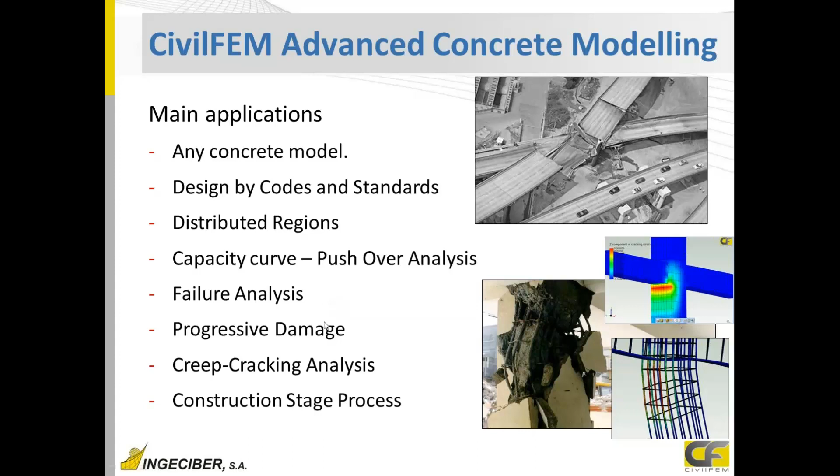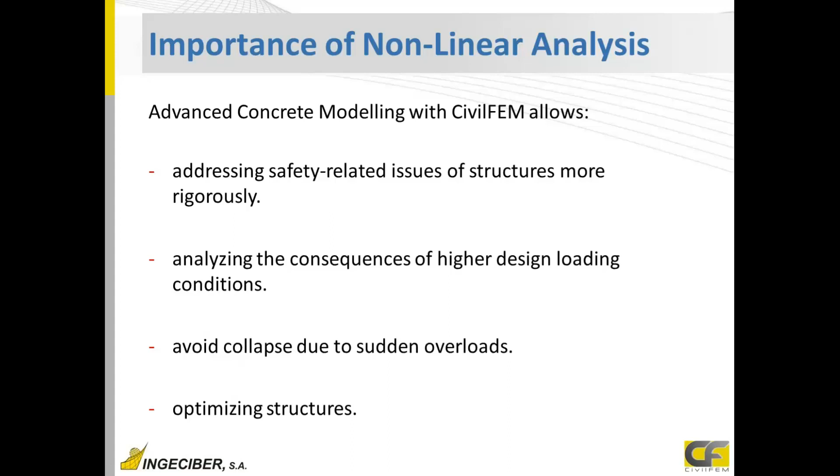And it's very important to analyze models also under nonlinear analysis, not only linear analysis and code and standard verifications, because in this way, as we saw, you can address safety issues of the structure, and analyze if they are brittle or ductile. Also, we can see what's happening with higher design loads and conditions, and if it will suddenly collapse, or just keep a small remaining stiffness and ductile behavior. And in this way, we can optimize our structures.

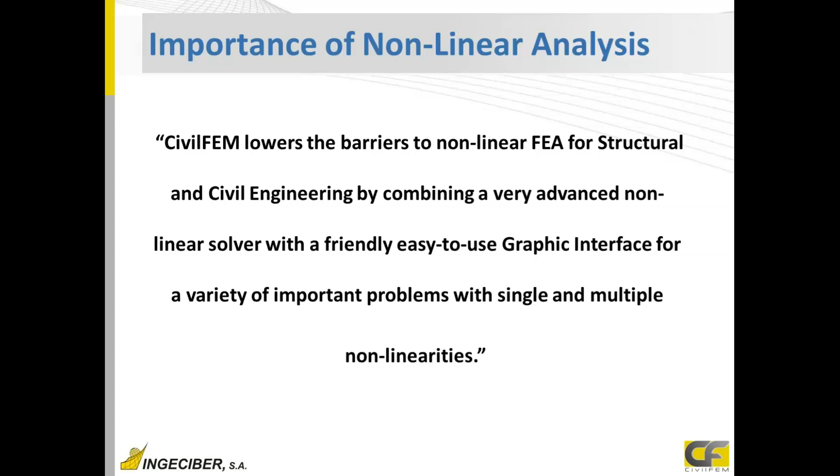So with CivilFEM, you can see it's very easy to perform this nonlinear analysis, code and standard verification, any type of analysis. And as you saw, it is very powerful for this type of civil structural analysis.